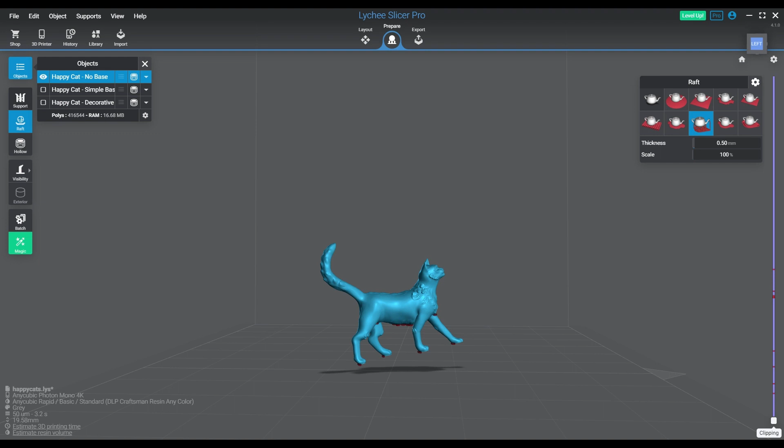It is a very small model, about 19 millimeters in scale from tail to toe. Most of it is actually in the middle, which is because it's a cat, so you've got that cylinder in the middle, and that's going to be the larger print area right there, which is why I've got him up at a slight angle.

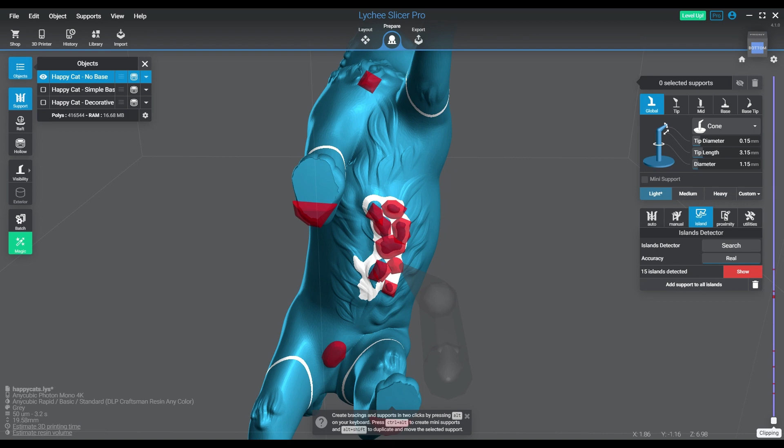The trick with small objects is to make sure that the support tips, as well as the support rods, and the diameter of both the tip and the rod itself, are not too thick. But you still want to be able to support the object itself, so you don't want it to slip. At the same time, you need to preserve all the small, tiny little details that are very, very hard to preserve on a very small model like this.

Now some people say, well it's so small, what does it really matter? It matters. Detail always matters. In 3D prints, I've always said there's two types of prints: there's okay prints, and there's good prints. If you want a good print, you need to make sure that your supporting is both adequate for strength and will preserve quality.

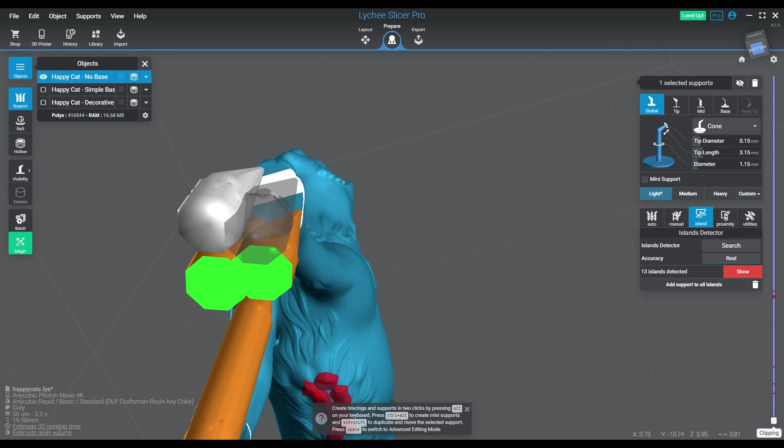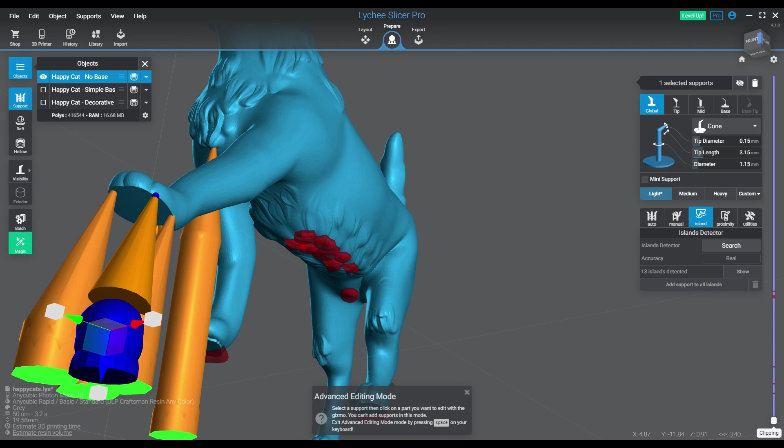And that is difficult to do in some cases when you're talking about small, tiny objects. Little scenery objects are also difficult too - cups, mugs, plates, things like that, just really small. The issue tends to be that no matter how lightly you support it, you still have that chance you're going to pull it off the supports and break it, just because of the nature of the object itself. Some things are just very small, or thin - a number of different issues there.

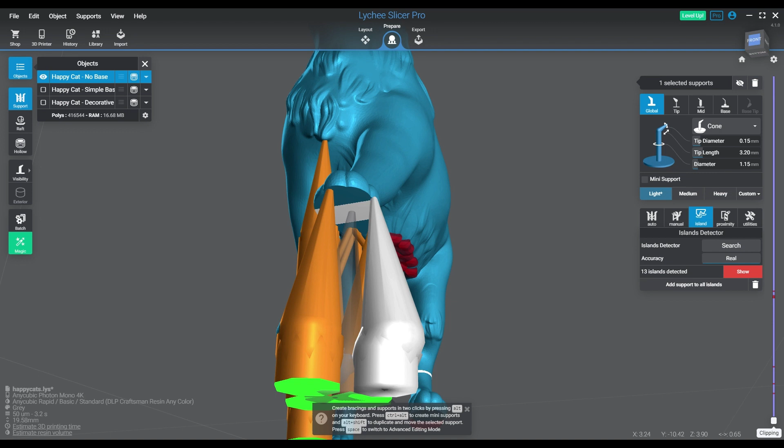It's not too complicated really to support a smaller object. As far as the actual support style, you're going to use a similar style that you would use with most objects. The difference is going to be primarily in the size of the tip and the bar, because you're not going to need that much support on a tiny little object.

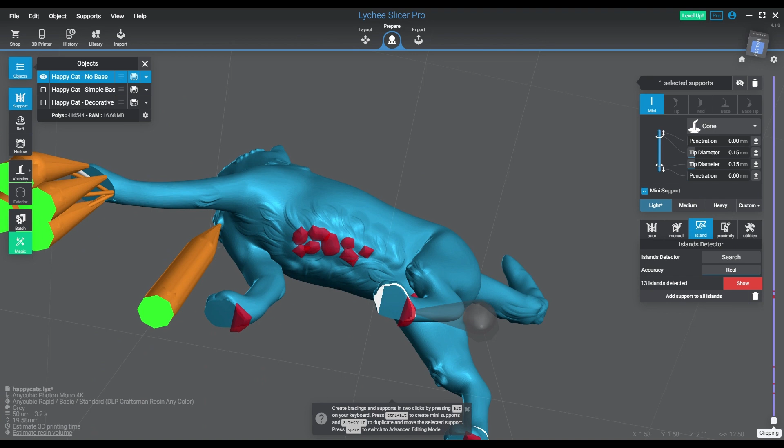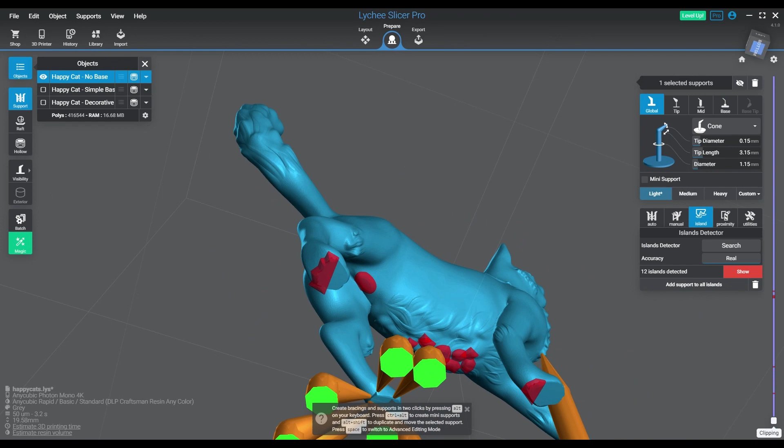In fact, I probably overdo it sometimes on some of these little objects. I mean, the support bases themselves are almost wider than the cat's paw. So in a lot of instances, when you're looking at stuff this small, the object surfaces are so small that the supports actually dwarf them in some cases. Like if you look at his legs, for example, some of those leg parts look like they're about maybe 1.5 millimeters thick, and the bar diameter itself is about 1.15 millimeter on this support style.

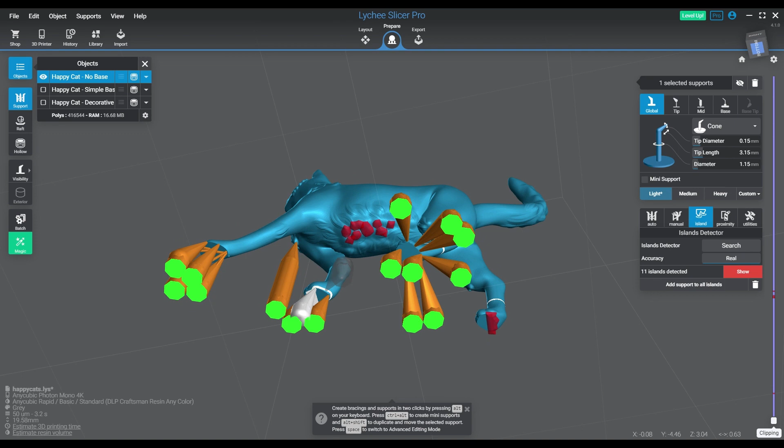So you're talking about a support bar that's almost as thick as the cat's leg. Yes, there are subtle differences obviously between the objects, but for the most part, you're building supports around an object that are about the same size as the supports. And you can build really, really tiny supports if you want to and watch your object fail because it's just not going to be enough to support it.

But there are better ways to do it. There's a couple different ways you can do this, and I'm going to go over that in the second video that I have planned, which will showcase how to do this when the object is attached to bases as well, because that also tends to lend its own difficulties. I don't think I've actually covered how to support an object attached to a base fully yet, so that might be a good side tutorial for you guys as well.

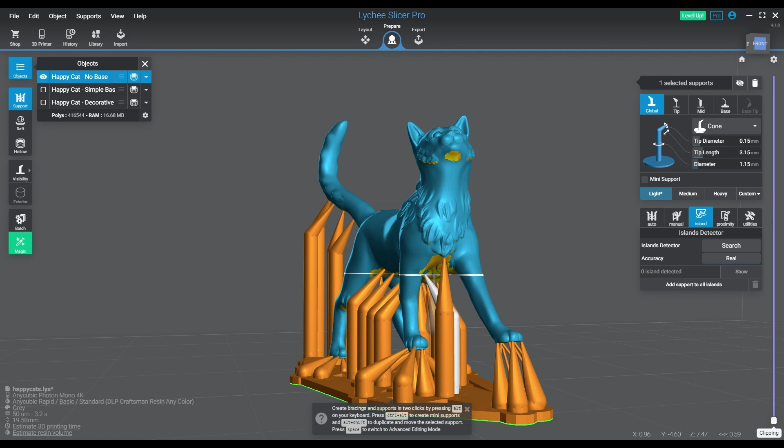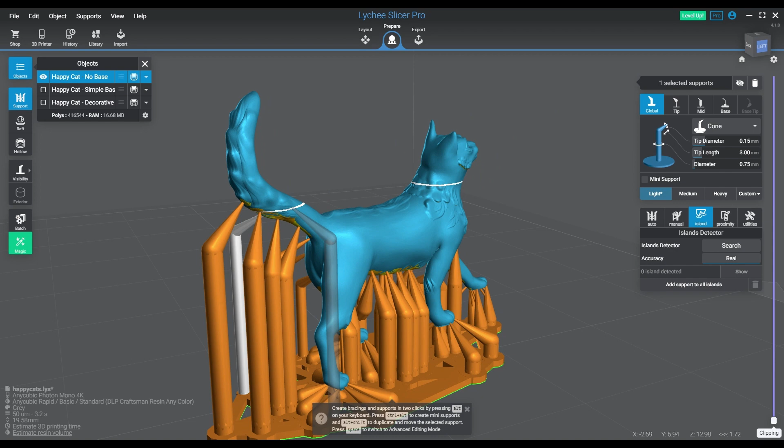Continue to make sure that you always address all the yellow zones and at least have one or more supports in the yellow zones to ensure that they are adequately getting the pullback that they need from the build plate.

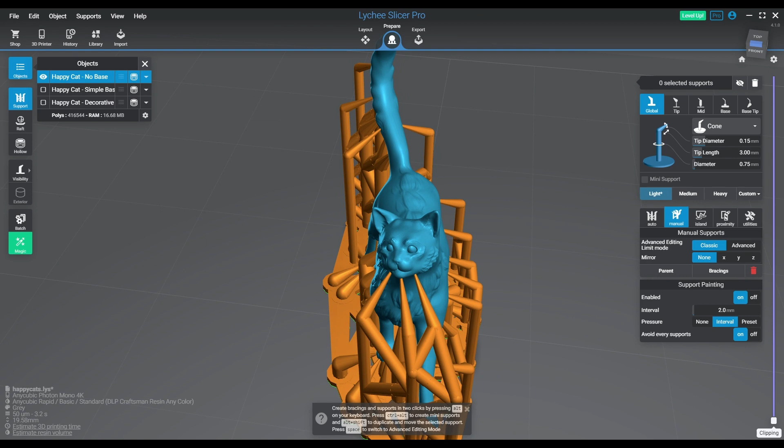One of the mistakes we can make is that we'll under-support areas and wind up with pancaking - sure, something you can easily go in and correct on your second or third print. But I'd much rather get it right the first time. I'd much rather over-support a model the first time I build it, and then go in and minimize the supporting for the second or third print, finessing it down to a point where it's printing perfectly with just enough supports to get it done.

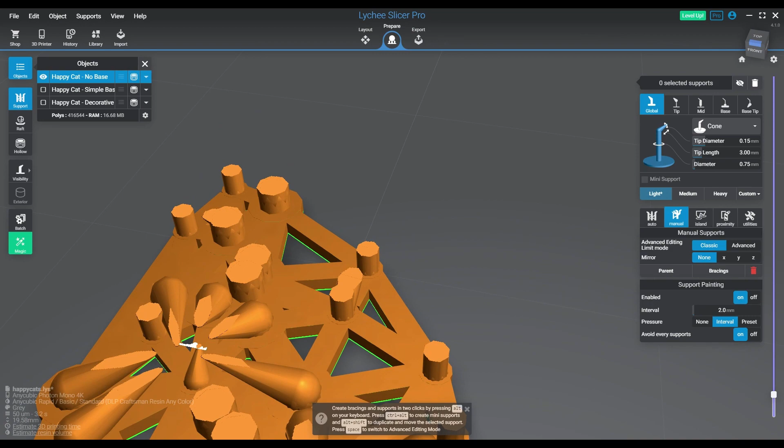Whereas going the other direction, you're just adding more and more supports until you get it to a point where, okay, now it's going to print good. And sometimes that can present its own frustrations.

Always make sure you check for contact points. That's super important, especially with small objects. Make sure the contact points are clean and you're getting good solid connections with the first couple layers of the print. This is where your success or failure usually starts, and it's one of the biggest reasons why prints will actually fail.

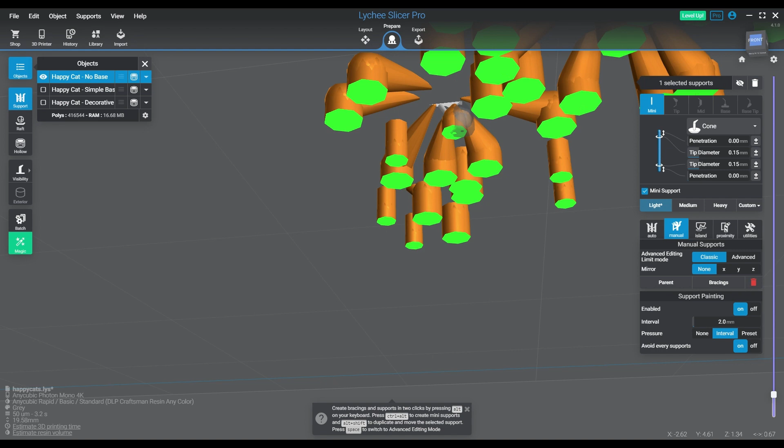The first layer isn't actually touching a support tip in some cases, and this could be an islanding issue, or it could just be that it's such a small pixel area that the slicer did not catch it. These are things you just have to learn to look for yourself when you go slice by slice.

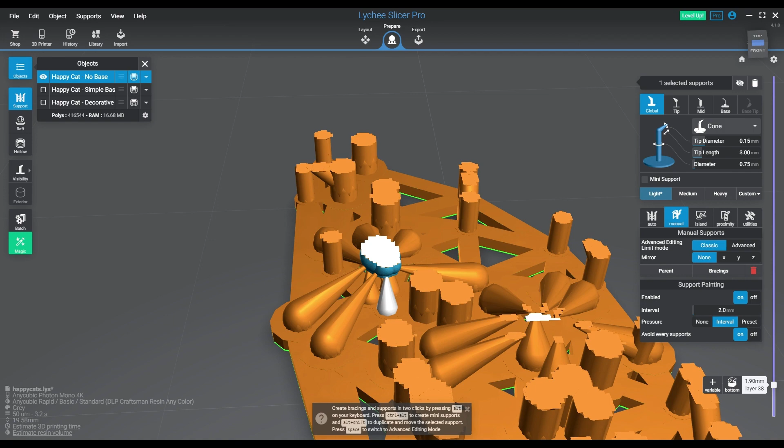That's one of the reasons why the layer slicer slider on the side of the prep tab is so important. Your ability to go up and down and see each two-dimensional slice as you build up in three-dimensional space really helps you see where your problem areas are going to start. You can nip them all in the bud and wind up with a much better printing experience.

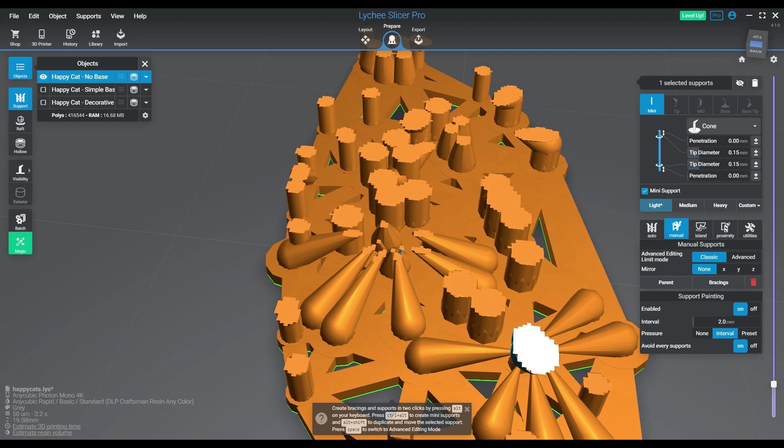Don't skip the island detection, don't skip the features of the program. Use the auto supports if you want to—they're there for a reason, and they do work. It's just not the best way to support your models. When you learn more about supporting, you'll figure out that the auto support system is good, it's adequate, it works, but it's too much in most cases.

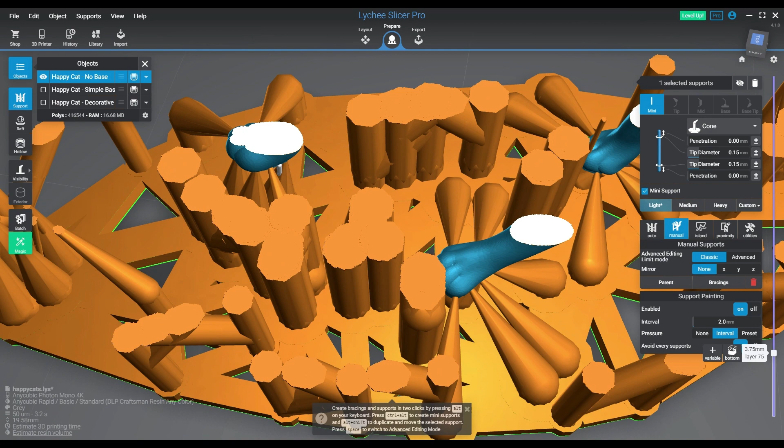You'll have to over-support in some cases with heavier supports to get it to work, because it's not a perfect system. It doesn't always support everything it needs to, and it'll give you pancaking issues because it's just a computer algorithm. It's not perfect.

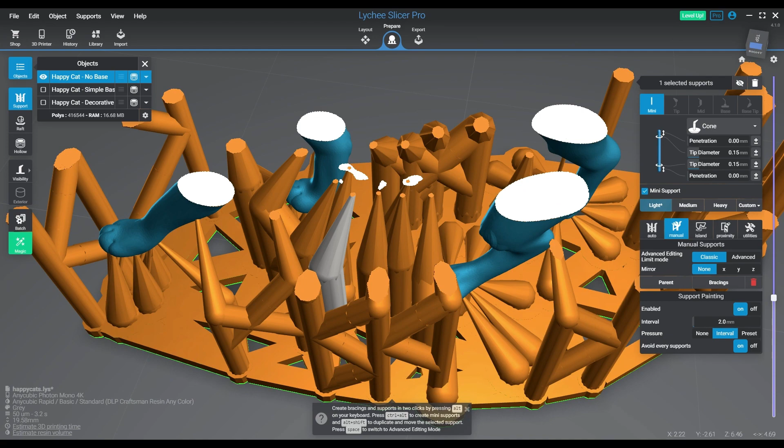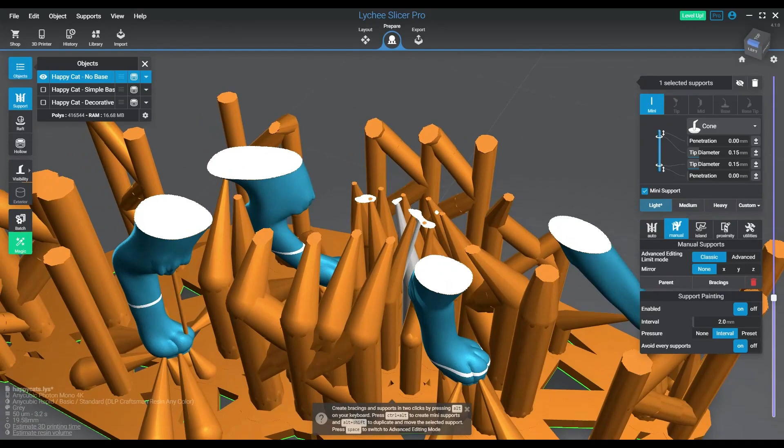So I do tell people, use those tools, learn how to use the software. Once you get comfortable enough to go in and start plugging in support pieces on your own, move them around, manipulate them, do your own island detections—great. Still use the tools provided in the software because they'll be beneficial and helpful. But also design your own supports, build your own support systems, and you'll find a formula for yourself.

I think it's important to pace yourself with this too, because it's daunting sometimes to look at these for hours and hours and hours at a time. So you kind of have to take it one little drop at a time.

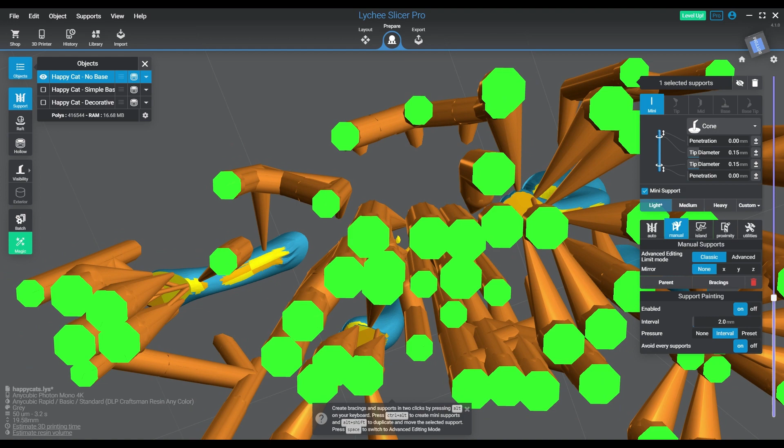That's the biggest advice I could give anybody getting into 3D printing as a hobby, a skill, or a profession: definitely patience and time. I promise it will get easier the more you mess with it. You just need to practice.

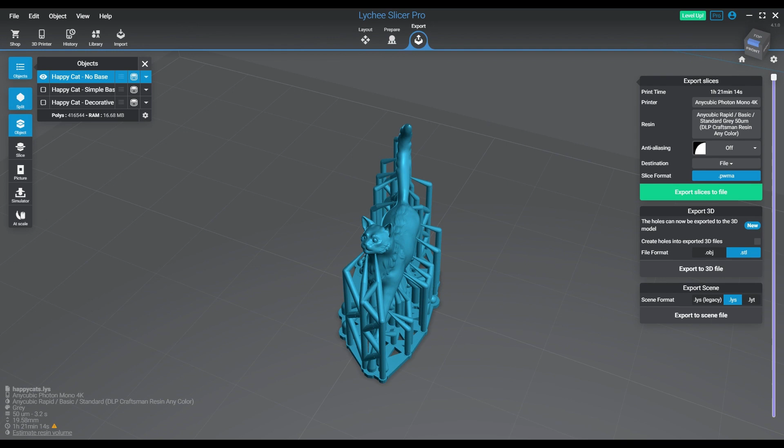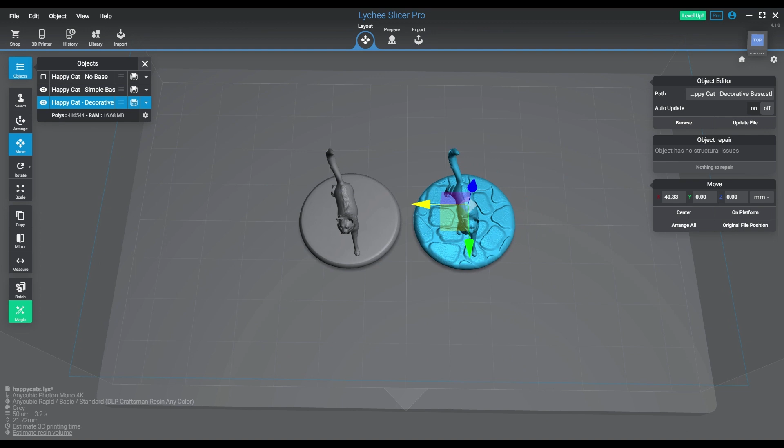We have another video planned where we're going to talk about the same particular model, and I'm going to show two different versions of it—a decorative base and a non-decorative base—to give you examples of how each supporting style can alter even the same model. You can use different styles of supporting and different structures and still get a good result. That's going to demonstrate that as well.